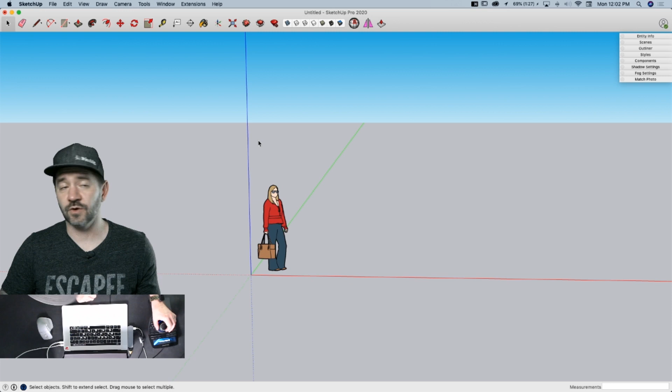For me, it's horrible. I can't use it at all. Well, have you ever committed yourself to it? No, I mean, I've been committed, but not to that mouse.

So to that point, and I've mentioned this before, it does take some time. You do have to get used to it. I would highly recommend taking your normal mouse and disabling the mouse wheel for 2 or 3 days and only navigating with this. You're gonna spend the first hour getting frustrated and clicking zoom extents, and then you're gonna try again. That's normal. But eventually, I did that for about 2 days, then I felt pretty good, and I've been pretty consistent with the mouse since then, and it goes pretty well now.

Okay. MCAD did post a link to an extension. I will take a look at that.

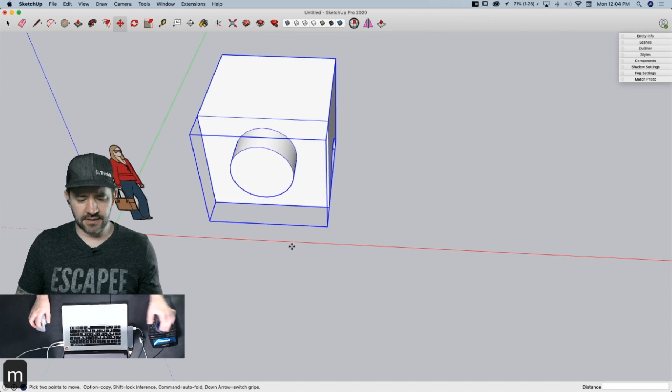All right, I'm going to say that this shape is something I want to cut in half. I'm going to do this a couple different ways, so I'm going to copy this over here at least once. So one option would be to just create a plane. So I'm going to start right here. I'm going to create a rectangle, and I'm going to stick it on this plane. Just a great big rectangle.

I'll take that rectangle and I'll move it to where I want to split. So I'm going to say I want to split it right here, wherever that is. What you could do then is come in context. In context means inside the group. So I'm inside the group at this point. I could select all and say Intersect Faces with Model. So that's going to hit everything in the model. The only thing it's hitting, though, on the outside of the group is that plane I created. So I'm going to go ahead and say Intersect with Model.

And now what I can do is I can take this section right here, copy it, paste it over here. There we go, that's that half. And then if I want to, I could just do that again. This time I'll just grab those same pieces, delete them, and there I have my two halves, and that's easy enough to just close that up like that. So that would be one option as a way to split that geometry. Another option would be to use something like Solid Tools.

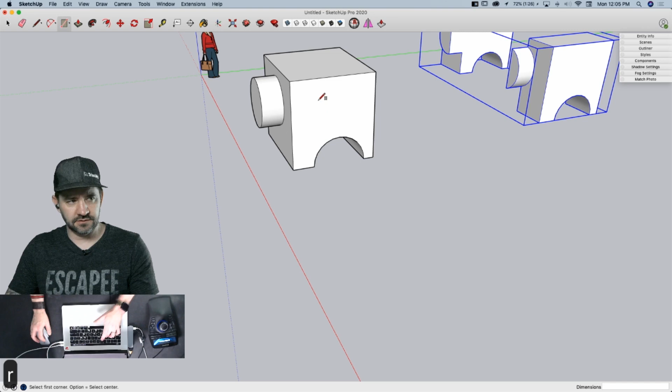So I'll do the same thing. I'm going to come over here. I'm going to create a rectangle on this plane. And instead of just moving it to intersect this time, I'm going to use Push/Pull and pull through that spot where I want to cut it. And now I will take this and make it a group. Now I'm going to grab this whole setup, copy it over here. I'm just thinking of interesting things to show, by the way. This maybe is not the best solution.

I'm going to take this rectangle and push/pull it through itself the opposite direction. And because I flipped it inside out, the inside faces show, so I'm going to hit Reverse Faces. So now I have two of these getting overlapped by rectangles from both sides. Now I'll go to View, Tool Palette, Solid Tools, select my cutter first, say Subtract from here, and it gets chopped off like that. Select the cutter again, subtract from here, and there we go. That's the same geometry I have here, just created with groups instead.

That is just using the simple pieces. There are extensions out there that will cut at a section plane. So I go in and create a section plane, look inside of it, and then say, break my model at that point. I think there's some other cutting tools too. Zorro, that's one of them. That's a great name. Yeah, you're going to cut something, call it Zorro. So check that out too. I have used it a while ago. It does do what it says. It cuts stuff. So give it a shot.

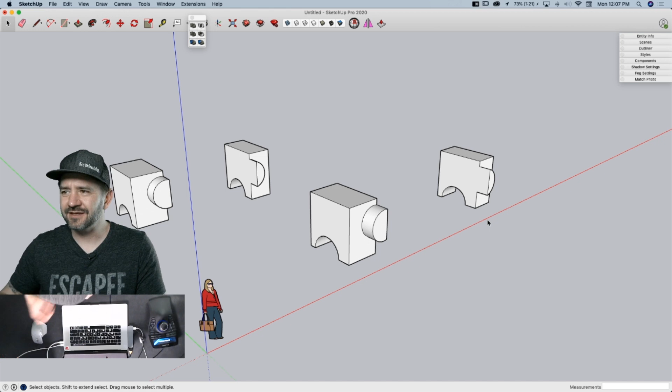Are all the instructions in Spanish? I don't think so. I think it ended at the name. Just a cool name. I think that it should only cut things in a Z form. Yeah, no matter what you do, it just goes like that. That would be a fun but possibly useless extension.

There's not a lot of questions yet. Rob Roy wants to know if you can hear him through his mask. No, louder, please. We're socially distanced by an unknown large number of feet, so.

It's variable. Yeah, we got lots of highs. People yelling in: Libya, Wales, Chile. There was someone hoping everyone was okay on the SketchUp team. I haven't heard of anybody on the SketchUp team actually having it yet, right? Have you? I haven't heard anything.

So, I mean, we try to keep pretty well connected, and everybody's trying to keep business as usual. So, checking in. We have a lot of hangout groups going on. So, trying to stay actively communicating with each other, checking in. And I haven't heard anybody say they've gone down. I've heard people say they know people or have relatives who've gotten sick, but I haven't explicitly heard anybody on our team say that they got hit with it yet.

And so far, I don't even know anybody that's been confirmed to have it. I have one friend that thinks he has, but who knows? I have a friend who had a roommate who had it. I'm like, oh man, lock him up. We're starting to get a little too far out.

Okay, so Barry McFadden asked this earlier, at 12:02, oh, 7 minutes ago, way back. And I don't know if you can help him. He just said sometimes when he makes a component, it doesn't group the geometry. I think that's maybe... We can do that. Well, I think I know. You show it. I believe the issue is right here.

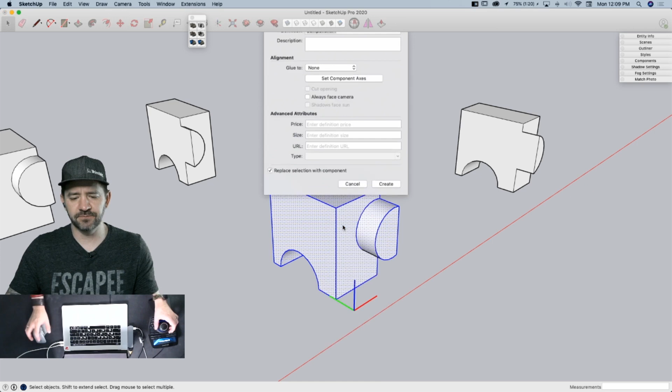So this is just loose geometry. It was a group, and then I broke it apart. So if I select this geometry, right click, and say make component, there is a checkbox in here that says replace selection with component. If this is turned off and I make a component, it has created that component. That component exists. In fact, if I come over here to components and look at what's in here, this component right here does exist. But this right here is still raw geometry.

You have to have that checkbox turned on so that it takes your raw geometry, throws it out, and replaces it with the component in the exact same location. So I'm guessing, go ahead and verify this right now. I'll stick around. Make sure that that checkbox is turned on, because most of the time if that doesn't happen, that's exactly why. That was my guess too. I support your answer. Great minds.

Kay Brooks asked if you're up for answering any DC questions. If we keep them on the surface, yes. Okay. Also, while they're rephrasing that, Leon wants to know how good SketchUp is for interior design. Oh, I was going to say countless. I'm sure we could count it, but a lot of interior designers love SketchUp. The nice thing about SketchUp... Go ahead. Go ahead. No, I'm done. Oh. You sound so defeated.

I was going to say the nice thing about SketchUp with interior design specifically is that SketchUp moves very quickly, so it's real quick and easy to iterate ideas and that kind of thing inside. We have a lot of people who will do design reviews with their customers sitting right there at SketchUp, so they can actually go in and move stuff around. The other thing is our 3D Warehouse, with just over 4 million models available. It's super easy to find assets to put into interior design. So yeah, great tool for interior design.

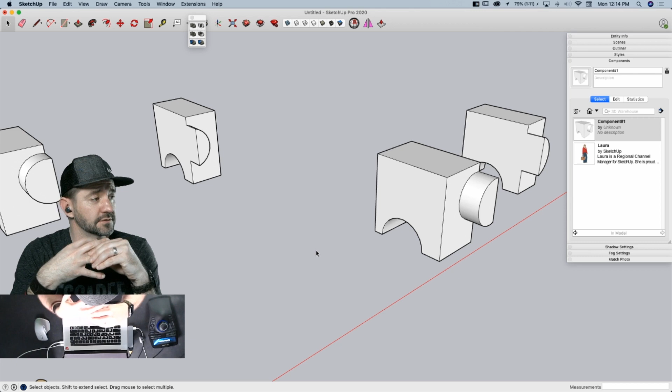That's one thing that gets a lot of people when they're bringing something in from AutoCAD: if they have it preserve origin, then all their stuff may be completely away from the origin, because AutoCAD or a lot of CAD programs don't really care about that origin location. Right. Yeah, depending on the CAD you're bringing in from, it may have something like world coordinates or local coordinates, and sometimes transposing those across programs can cause problems. So people bring in original data, end up putting their data halfway around the world from the origin, and that can cause problems too.

I did see a question just a moment ago asking about Soap Skin and Bubble. I saw one. Isaru had an error message. Is that the one you saw? Yeah, time limit finished. Yeah. Go upgrade or update. Usually that's it. Actually, Dave Richards answered that three lines lower down.

Phew. So you're slacking, or I guess you're just too talkative. Well, I'm just not as fast as Dave, and I've accepted that. Okay, that's fine. He doesn't have to use audible words. He can use... That's right.

Visible words. Manny Hepburn wanted to know about exporting models from the 3D Warehouse without bringing its materials, i.e. export it to his model with default face colors. Nothing that I know of. There might be an extension out there that does something like that. What I always recommend, if you're going to bring in something from 3D Warehouse, is don't bring it directly into your working model anyhow. Download it, open it up, and then you can do things like go in and delete your colors.

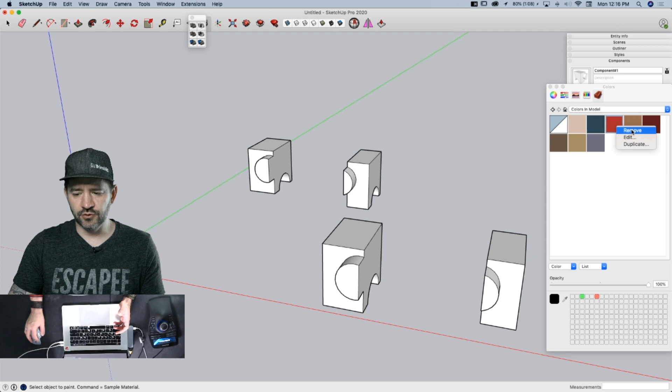So this model right here, I do have a handful of colors because of Laura. So what I could always do is come in here and remove these colors. So I could actually take this red, remove it, and say replace with the default color, and that'll get set back here. So I could come in here and just work my way through and delete them. I believe there's an extension to remove colors as well. I don't remember what that was though.

But if that's what you want, you can pull a model out, remove all the colors out of it, and then take that file, save it and import it into your working model. I say don't bring it directly into your working model because it's hard to get a full appreciation for what's inside of a model when you're looking at it on 3D Warehouse, because you can't see everything. You can do some orbiting and panning and zooming in a little bit, but you can't really get into it, select pieces, toggle hidden, check tags. You can't do all that while you're looking at it in 3D Warehouse.

So I always recommend downloading and opening it. This is just my workflow too. If you have a different workflow and it works for you, that's cool. I try to download it locally, look at it first, and then import it into a model. That just prevents it from, sometimes you download something that seems like it should be innocuous, and it turns out that the dishwasher I downloaded has 7 million polygons because who knows why. So that's something else you can check for when you import.

So K Brooks came back with their possible surface level question about DCs. Can options be programmed to be invisible until a parent option is chosen? No. UI is UI. There's no control over if UI shows up in a dynamic component. I can't think of any way to make UI change. Yeah, okay, fine. I don't think so.

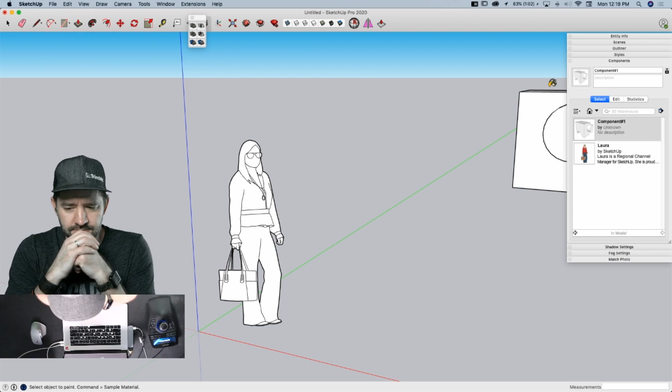So, what I would recommend, I don't know that there's a single style that works best, but as you're learning to work in SketchUp, the thing that sets SketchUp apart from other modelers is the look. Some people think it's cartoony. You have full control over that. If you go to your styles window, there's a couple things you can turn off. Profiles is one thing. Profiles is that darker line that goes around the outside edge of something you're looking at. Sometimes turning that off gives a crisper look that people prefer.

The other option is to turn off edges altogether. Then you're looking at just a solid model, shadowed, hidden look like that. I would highly recommend, it's going to slow down your model, but you could check out shadows too, because turning on shadows will definitely give a more realistic look. It is processor intensive, so if you turn on shadows, it is going to slow your model down a little bit. Generally speaking, one of the things that wins people over to SketchUp is its speed and ease of use.

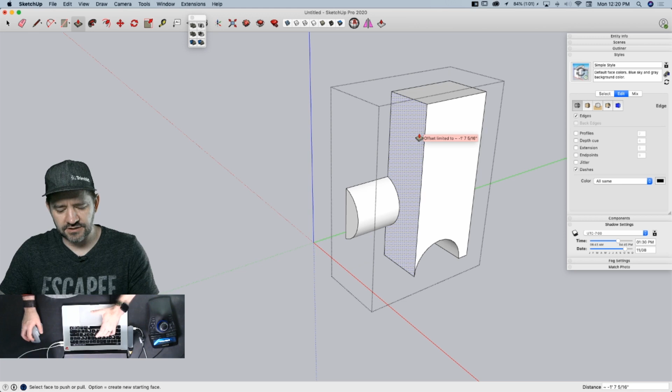So regardless of the style, the fact that you could come into a model with your coworkers, make changes, whatever modifications you need, you can do that live while you're sitting there with your coworkers is what gets people to go, oh, maybe I should check that out, because we've seen live design sessions where people went through with customers or coworkers and just overhauled an entire design, entire model,

in half an hour, something like that, where traditionally they'd be modifying the model, generating output, sending it over, there's 2 hours gone, get a response back, go do that again. So hours and hours versus sitting down and working in it. That can make a big difference for people. So that's something to consider showing.

As far as a specific style, I don't know that there's one style that is a professional style. I would say look at it and see what's going to look closest to whatever your coworkers are expecting out of CAD. The nice thing about SketchUp is, given your styles, you can pretty easily emulate other looks. So between your styles and your camera settings, where you have things like your field of view, you can change how exaggerated that field of view is, or even go to your camera and change to parallel projection if that's something they want to see.

Play with that, and not that I'm saying you should always emulate another look when you use SketchUp, but to ease that transition and make it look like what somebody's used to, it can really help with your cause of advocating for SketchUp where you're at.

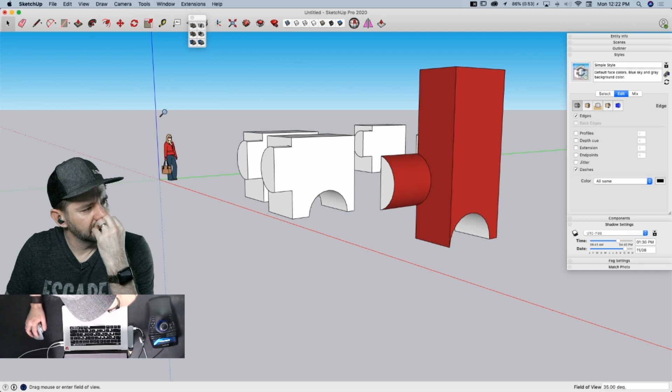It seems like there was an extension, I'm trying to remember now, that would find maybe... Dave or somebody out there, John's out there, Chris is out there. Do you guys remember an extension that would find your components in your model by face count or something like that? Statistic selected. That's true. Oh, is that the name of it? Dave is recommending Statistic Selected, which I believe, and correct me if I'm wrong, Dave, will give you information about selected geometry.

Because, oh. Yeah. Sorry. Keep it simple. The KISS method.

So Go Fly Drone asked how to, so this one's one you do all the time, so it's probably good just to take a moment and explain it. How to import a picture, but keep it in 2D so you can see it all the time from any angle within the model. Yes.

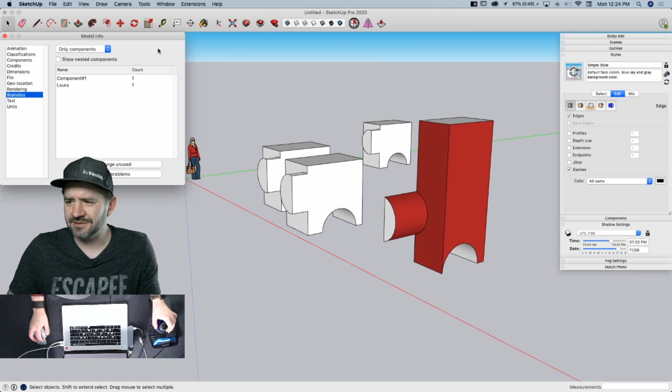Hello? Sorry, I'm trying to follow Dave's suggestions. Under statistics, I only have entire model or only components. I'll come back to that when you tell me what to do.

Yes, so if you want a picture, I do this a lot for reference photos. If you go into your styles and across here, it looks a little bit different for Windows than it does for Mac, but you do have these tabs right here. This fourth button is Watermark. If you click on Watermark, you can load an image. So if I go grab this thing right here, it's going to start by putting on like a watermark, so like an image laid over the top of your model.

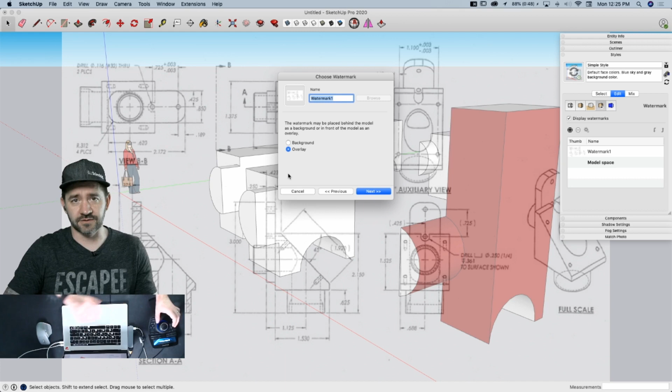The purpose here is, if you print this out or something like that, you can put your watermark over it. So this is a cool way to put your logo or, you know, preliminary, you want to put a watermark onto your model, you can do that. But what you can also do is say, I want to put this in the background. This is going to sit behind your model. So now, no matter how I move this around, it's always going to land flat and back like that.

So what I often do is come in here, you can put a slider, so how much do you want to see? I usually set it to 100%, and then I usually tuck it into a corner. So I say position window, usually up here at the upper left corner. Make it just big enough so I can see the information I want on it. And now I can work on whatever my model is and always have that information up there. So that's how you would take an image and put it on your screen so it stays the same no matter how you're zoomed in, with a watermark. So that's a good question.

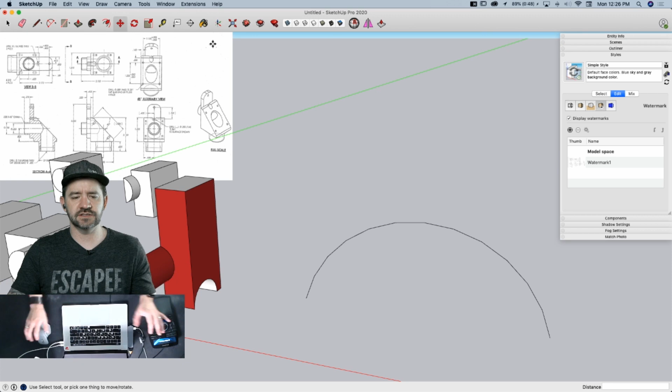So Derek on Facebook asked, the other day during the Airstream modeling, you modified an arc just by moving an endpoint. How did you do that? So let's do that. I'm just going to put an arc here along the red axis, and pull it vertically along the blue. The way move normally works, if I go into move with nothing selected and I hover over, say, a group, I can click, grab it, move it around. You guys know that. If it's raw geometry, I can move a surface, a line, or I can move over a point, and then I'm moving just that point.

Arcs are kind of funny because as I move them, they'll actually scale. So I'm not just grabbing that end point of that last segment and moving it over. I'm actually going to cause the scale to resize and distort depending on how and where I move that. And that's all I did. I just happened to grab the end of an arc that was, I think, flat. I grabbed it, pulled it over, so it just kind of expanded the arc as I moved it. So pretty simple. Move is nice. A lot of people don't realize that if you go straight into move, you can grab whatever point you want and make changes. So if you grab an end point, you can actually deform that geometry from that point.

So Tyson on Facebook asks, well, it's rather lengthy. He opens with our favorite sentence: I love SketchUp so much. Know it's been discussed on the forum, but I'd love to hear what you plan regarding UVs for SketchUp. Will SU ever integrate native UV capabilities? It sounds like he understands that we can't talk about our roadmaps, but he'd at least like to hear your thoughts on the matter.

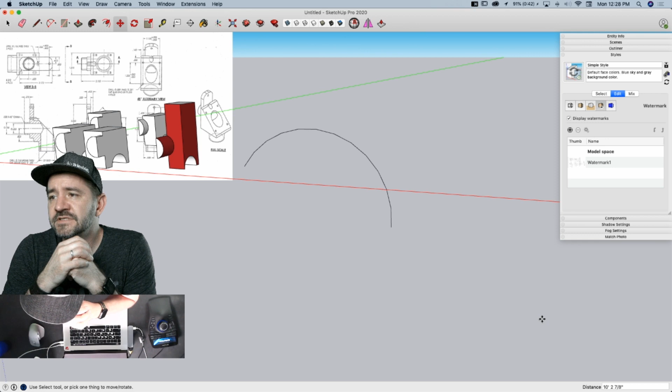Even if your thoughts are use a plugin, I'll say that there's a handful of great plugins for UVs. Personally, I like that SketchUp does and always has focused on what they're good at, which is 3D modeling. And I think there's a lot of tools out there that get distracted by bringing other workflows into their core competency. I don't know what the future will hold, and if I did, I couldn't talk about it. But I've never been bothered by the fact that if I want UVs, I can go grab Wrapr or SketchUV or something like that.

So I don't know. Like you said, unfortunately, can't say much about it beyond my thoughts. And that's it. That's my thoughts. That's all I got. Hey, well, sorry, Tyson. At least you have some.

Okay, so I think there's a good question in the middle of this. So this is Manos on Facebook. When I make a house floor plan and make the walls, there are a lot of times that the walls are not solid. So he can't make them and then subtract the doors and windows. He uses Solid Inspector, but no result. So he would like to know the right way to make a floor plan. I think this is one of those we ran into before, where it sure would be handy if you had some floor plans on your computer.

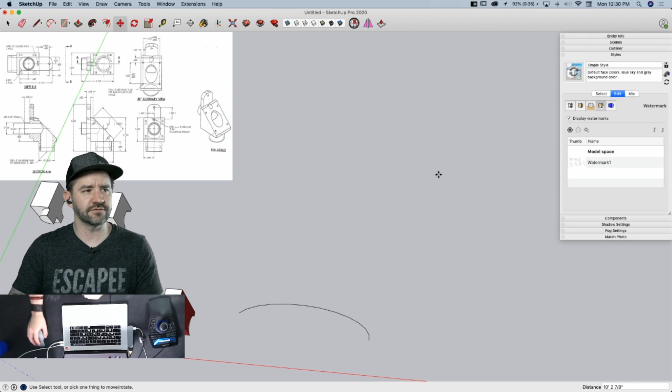What I would recommend is, and this is just going to be kind of a dummy version, I've got to turn this off because this is distracting me. All right. So as you're working through here, get your exterior layout. So this is the shape of the floors of my house, something like this. So that's just tracing my exterior walls. Then I would do an offset of whatever my wall width is, so I'm going to do 5.5 inches. Then pull that up to whatever my height is, 9 foot.

And then I would triple click and make this a group. That's my first group, my first floor exterior walls. This then can be made solid. So if I wanted to come in with whatever my door is, so if I create my door, I could actually bring this through and then subtract that from here, and I could make those cuts real quick and easy.

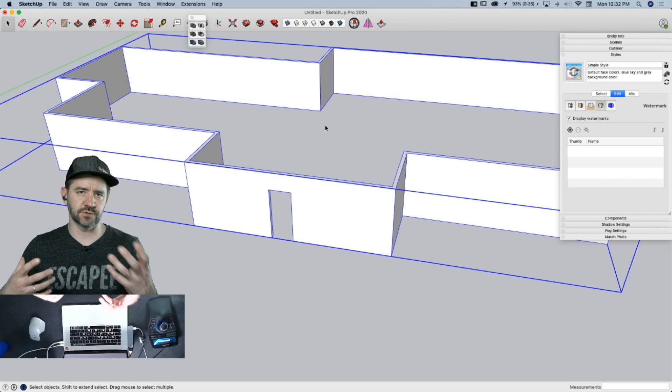When you get into interiors, it's not quite as simple because, again, this kind of comes down to what you're going to use it for. What you might want to do is take each wall as you create it and make it a group, because that's going to make it a simple solid. The problem a lot of people run into when they're doing architectural models like that is you end up with so many lines, so many pieces, so many things. It's really hard to watch as you do each piece and make it a group. But that would be my recommendation, is try to do that.

The other thing to keep in mind as I do this is, so now I have two solid groups meeting at the corner. That's great, but that also means I have these extra lines. So this line right here, for example. And that's where what I have to do is come in here and then maybe just shift erase this line. And, oops, I did not shift, I alt erased that line.

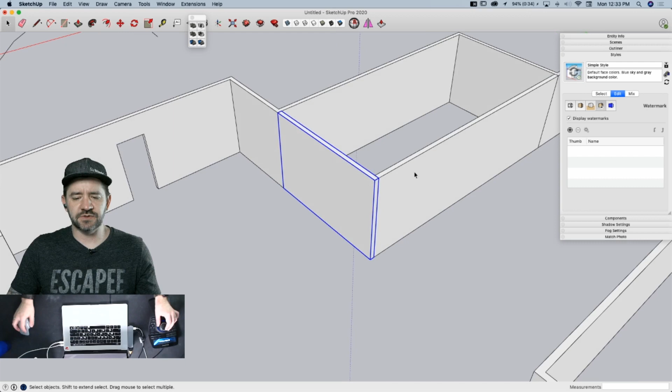Sorry, shift erase that line to hide it. Shift erase that line to hide it so that I get a normal corner right there. In fact, I'm spewing thoughts now. If this is an issue, if you do want to keep each wall as a separate solid, like I said, that's awesome. It's a great way to do it.

You might check out an extension from Eneroth called Visual Merge, which will actually do some of that kind of stuff automatically and get rid of those overlapping lines. So those are all things to think about. So if there is a specific model you're having a hard time with, I would say head to the forum, make a topic, and if you can, post the model, because then somebody can actually take a look at it and maybe help find, maybe there's something that you're doing along the way that's causing them to not be solids. But yeah, it's a good question.

Sorry, I was typing answers, and so I wasn't scrolling through looking for great new questions. Nepali on Facebook did ask about how to make dynamic components through coding. I sent him a link to your videos. So just so anyone that wants to learn about dynamic components is aware, there's an 8-part video series at this point. 8? And I will say, there is no coding in there. I do know that's possible. What about math? Is there any math in there? I will venture into math if I have to, but I can tell you that I did not use any Ruby scripting of any kind.

You know, actually, that question's come up dozens of times. People want to see videos on the basics of coding, basic Ruby scripting. And that's never been my thing. I'm not sure if that's something that's interesting to enough people that we could go in and try to learn that together, but Ruby scripting falls outside of my area of expertise or knowledge, so I won't say that I did it with code.

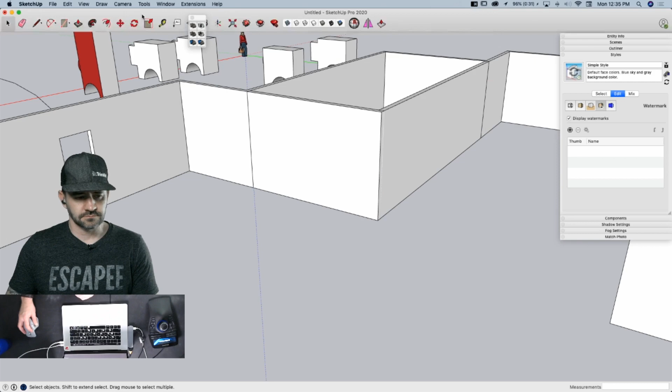Yeah, I forgot to call that out earlier. Thanks a lot. Now I didn't remind you, so I guess I'm equally guilty. Well, I think it's mostly your fault. Okay, good. All right. Wait, my fault? Dang it. Next time.

Let's bet 20 said, can't push pull opening to offset limit. Cutting stays connected to wall and only extrudes inward and outward, but never removed. I would guess something is out of plane. It's not easy to show, but here, let me see if I can cause a problem. All right, so these walls look pretty close to being parallel normal, but that back plane is just off of being parallel, so it will never actually let me remove the face.

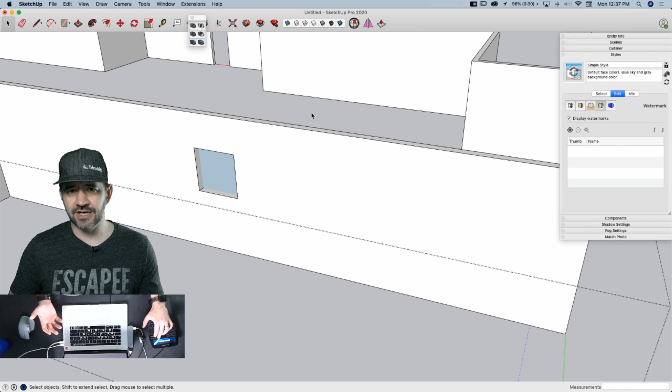I can get close to the face, but I can't actually take it and cut it out because this wall is not perfectly vertical. So if you have something like this where you're push-pulling, it's possible that something's not quite right. There's a couple things you can do to fix it. First thing I always recommend is turning on hidden geometry. Show hidden geometry, because sometimes what will happen is you'll have a break.

Autofold is this cool thing that happens inside of SketchUp when you move geometry, where this face will break into multiple pieces in order to accommodate the fact that you're moving the edge. So autofold's great because it can let you create really cool geometry, but if you're not paying attention, it can take what looks like flat geometry and actually put wrinkles in it. And you can see those if you turn on hidden geometry. The other thing to check out, like I said, I just took this and I moved this bottom out just slightly.

You can actually check coordinates, see where stuff is, just by using the text tool. So if I take the text tool and I move it up to an end like this and just click, it's going to give me the XYZ coordinates. So if I do that again, I'll put one on this bottom here. So if I look, whoops.

So you can see right here, my X coordinates are the same, my Y coordinates are off by 1/8 of an inch. So that's where this is actually pulling out. Then of course my Z coordinates are different because it's the top and bottom of the wall. So those are some things to check out.

Again, I would recommend post to the forum and let somebody take a look at it and maybe help you out. It's hard with stuff like that because it's usually something specific that's going on that's preventing this from working. And sometimes it's hard to guess what that might be without being able to see the model. So if you have an example you can share, I would suggest posting on the forum and letting some staff or Sage or other forum members take a look and maybe help you troubleshoot.

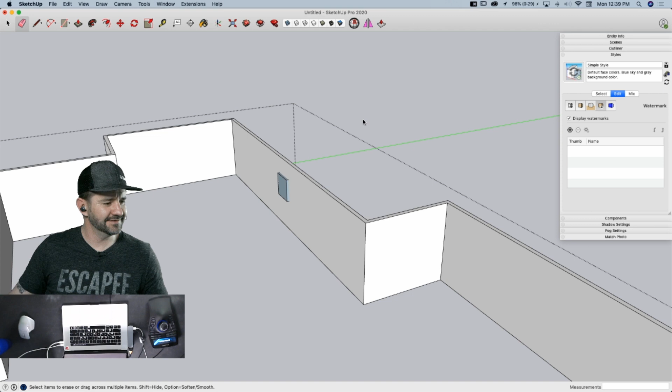Yeah, and it's interesting, this is Architecture Inspirations on YouTube who corrected me and my gross simplification of UV to mean fancy textures, which it's not. Right. It actually has more to do with the exact placement of the texture on the geometry. Maybe he was explaining it to me, and maybe he's not asking a question. But oh, yeah. Well, that would be the problem. So what you're describing is what UV mapping does. It sounds like you may already know that. But anybody who doesn't know, I think that was a good example.

Yeah, no, I think I do now see that. I'm just basically reading out when he corrected me. Thanks again. That was an A and not a Q. Yay! I love it when those come from the other side.

Okay, so here's the other curvy one. What's the best practice to cut openings in curved walls? Should one use two solid forms and use the unions to cut? Yeah, I think it would, if you do have something like a solid. So let me just do something like this. I'm gonna take this shape and offset it ever so slightly, connect these two together to get a face, and then pull it into 3D space. I'll turn my hidden geometry back off.

If I can make this into a solid group, then the easiest solution is to come in here, create a second solid that is my cutter, make that a group, and then I'm going to do this 2 times. Do it once with solid tools and once without. So with solid tools, I select my cutter, go to my solid tools, say subtract that from this, and I get a hole there.

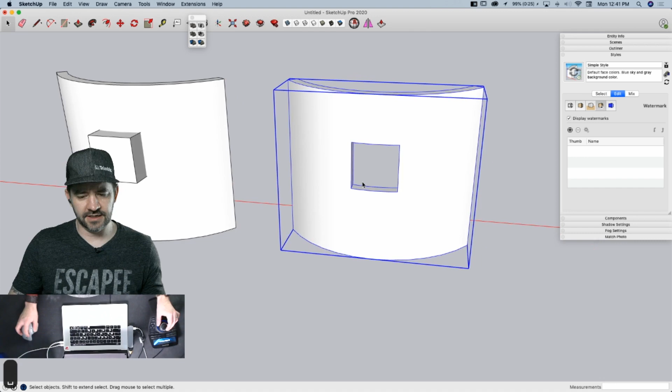If I don't want to do that, if I don't have solid tools, or this is a piece of bigger geometry where I can't make it a simple solid, I could take this geometry loose like this, so it's just loose geometry. I'm going to take my cutter geometry, I'm going to say reverse faces, and I'm going to grab all this geometry that intersects, right click, intersect face with selection, and I'm going to come out here and start erasing away my geometry on the outside. And then I can take these faces right here, delete those, and delete that.

So what happened was these two faces got cut by that cutter, and the cutter got cut by those faces. So these pieces right here are actually the leftover pieces of that cutting rectangle I had in there. I reversed them so that after they were cut, what was left behind was facing inside of the hole. So those would be your options for cutting an arced surface. It's not as simple as draw a rectangle on it and push pull.

One thing you could do is you could get into extensions and use things like Tools on Surface to create lines on the surface, and then something like Joint Push Pull to push it through. But it really depends on what your actual needs are and how difficult you need to make the process.

Okay, so a while ago, Nanda asked if these videos are available to watch later, which ties into an additional question from Eric on YouTube, which was, as architectural models get larger, when working on small details, you have to zoom in very close and clipping. So I would say to Eric, probably you need to go back to our answer of the clipping question earlier, and to Nanda, we have it available online. Do you have any thoughts on clipping whenever it's tiny versus whenever it's giant?

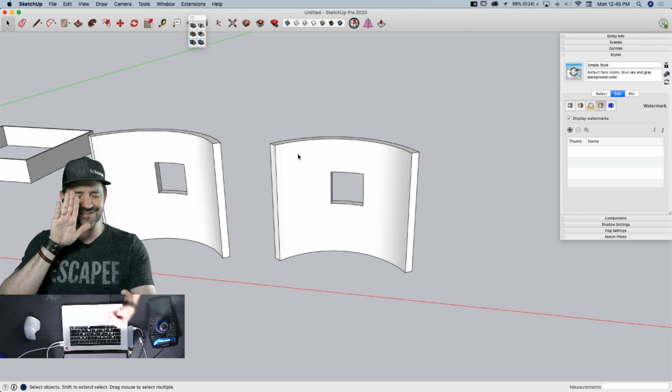Yeah. I'm not sure how much scaling would fix that or not, but I had somebody explain it to me as if you were to take an architectural model and build it out of balsa wood and foam and plastic, like we used to in architectural school, and then you wanted to get real close, you just smashed your face against the edge of it. That's basically what happens when you experience that clipping plane. The camera's coming so close to geometry that you're going into it.

Whenever my kids want to show me something, they come over and stick it immediately in my face, and I can see nothing. Yeah. I still have to tell my kids, I don't focus real good right here. Give me at least 6 to 12 inches of focus space. Ugh. So it's all applicable.

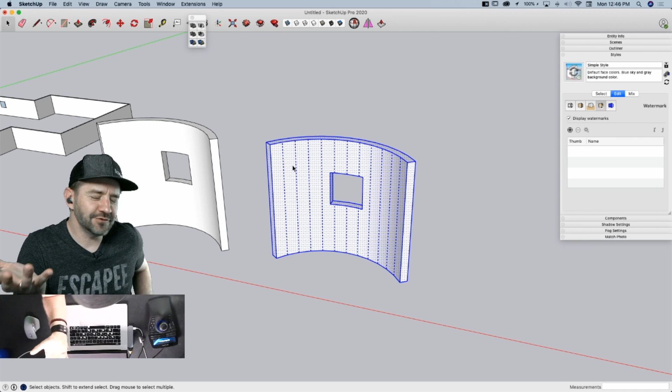Well, if I have to answer in Russian, I can only say da, because I think that's all the Russian I know. And I'm not 100% sure on that even. I think that means yes. Yeah, that's movie Russian. All right, just because we're hanging out, we're having fun. Who decided in movies that German people speak English to each other in German accents? If you're two German dudes talking about something, wouldn't you just talk in German? It's so funny to me that I keep watching these movies. Obviously you're not German, apparently, Aaron. Yeah, it's true. You just wouldn't get it.

Okay, well here's something I get. So if I wanted to take this geometry right here and rescale, let's say this is supposed to be 2 inches tall. Obviously it's a lot bigger than that. I'll draw a line right here. It tells me it is 32 feet tall. So if this is supposed to be 2 inches, I would triple click and make it a group. Put all the geometry inside of a container first.

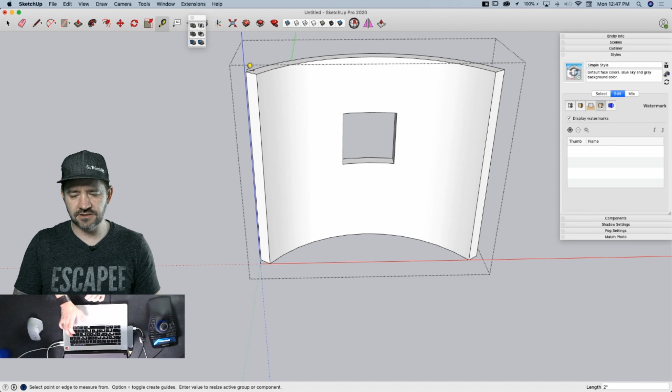Then I'm going to double click to enter the container, grab my tape measure tool and click from the bottom of one side to another side, somewhere end to end on a line that I know the size of. When I click here, right down at the bottom, it tells me what the length is, and I'm going to tell it what I want it to be. So I'm going to say 2 inches, hit enter. Do you want to resize the active group or component? Yes, I do. There it goes, it gets teeny tiny. If I come out, here's the original one, and right down here is my new one.

That's adorable. It is. What is that? A curved wall for ants? That's right. 2 inches tall. It's a little tiny guy. You could 3D print this. One could. Oh, okay. I thought you were giving me permission.

But sorry, Blake just said, because Americans don't want to read subtitles. I think that's true. So this is funny because that's sort of true, but I've found that on all of my streaming services, I turn on subtitles because half the time I don't understand. You know, like even if I'm watching Americans talk, I'm just like, what did he just say? And I have to look down and read the text at the bottom. It's whenever I have to read the text that I get all cranky. Yeah, when you don't have a choice. Yeah. Don't tell me to read. I like the option. I'm here to relax.

Someone asked if you could use the extensions in the web version. You cannot. You do have to have Pro to use extensions. It's a limitation of the language we use. Ruby is not available through browser software. So that's where we're at right now. That's what we got.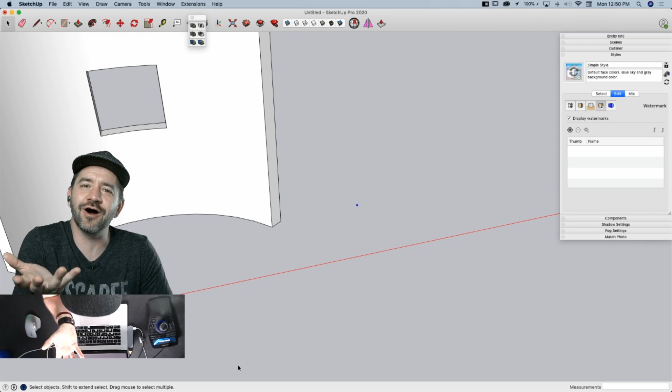So I'll second that, and then I'll return to questions. I scrolled up, and there's one here from JDC AMC. We'll just say JDC for simplicity. Yes. Can you match a color that you downloaded from the internet to an existing material? Or how can you do that if you can? So it's slightly different depending on the UI you're using, but you can. It's in a different spot. I don't know if you remember where it is, Jody, off the top of your head.

In Mac, when you bring up colors and you go to the main color right here, you can actually hit this little eyedropper, and it gives you this control, and you can move your mouse over any color on the screen. So I could sample this blue from the upper corner right there, and then that'll show up in my dropper, and then I can put that on something. The other option, of course, is to come in here. Where is it? Right here, I could type in a hex color. I could change my sliders to CMYK or RGB and put those values in. So it's pretty easy to adjust colors to match something.

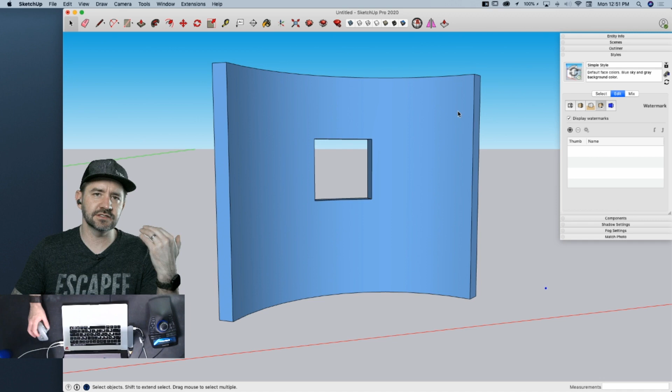Something I'll point out though, because many people have hit this. Let me get a slightly lighter color than this, so this is a little easier to see. All right, if I look at this face right here, I put one specific color on here, but you can see because of the way the light hits it, it's lighter right here than it is right here. See how it gets darker along the edge? SketchUp does have kind of this faux lighting effect it places onto surfaces.

What actually happens is the camera, as it looks at a model, projects the light in the scene. So there's a faint light coming off of you because you are our sunshine that changes only the colors

Sunshine, or? As we look at it. What's that? The only sunshine? No, I only thought you were starting to sing "You Are My Sunshine." That's what I was getting at, and I couldn't stop. I had to laugh.

So you can see this face right here and this face right here. If you imagine the light coming off of you as the viewer, it's creating kind of a shadow, a darker color right here. So that is something that can be compensated for, because I can come in here to shadows.

And shadow settings is kind of interesting because it does have the ability where you can come in here and change the actual shadows that fall on here. But even with shadows turned off, you can control your light and dark right here. And using these, if I turn use sun for shading on instead of my own face, this is a little more consistent because the sun's in one spot.

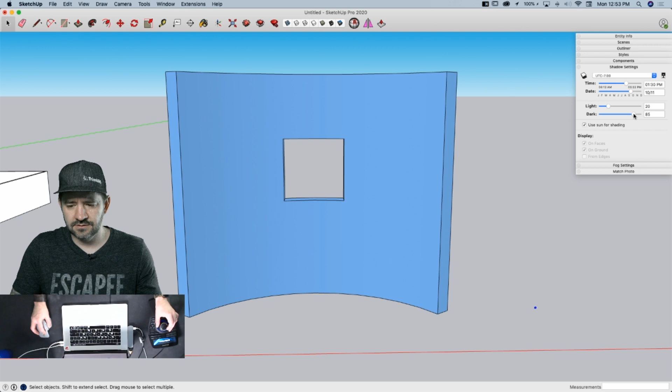Is it 80-80? That gives me a list. It's 80-20. You can also click in the box and type it. I like sliders. All right, if I go to 80-20, then I actually get a consistent color. So you can see there, I'm not getting as much shadow as I was before, but these can actually be played with to give yourself precision colors as opposed to that lighting.

I just mentioned that because you mentioned bringing in an exact material. A lot of times people bring in materials and they're like, oh, this looks way too bright or way too dark. It could be a function of that lighting. So something else to consider.

I just looked on the Windows version, and the dropper is right there, in the very front section of the materials picker. Okay. It's right next to Colors in Model. It's on the right side, right above that picker. Okay. So if I was in Windows, it'd be right up here somewhere. Exactly.

Learn something new every day. You might have already known that. It might have just been a refresher.

Yeah. Maybe. Derek on Facebook asked, he said it's a noob question, but I think it's a good one: what's the value of making something a component versus making a group? Excellent question. So I'm going to make some geometry right here. I'm going to make this a group and make a copy of it over here. If I open up this group and I change it, this other group stays exactly the same.

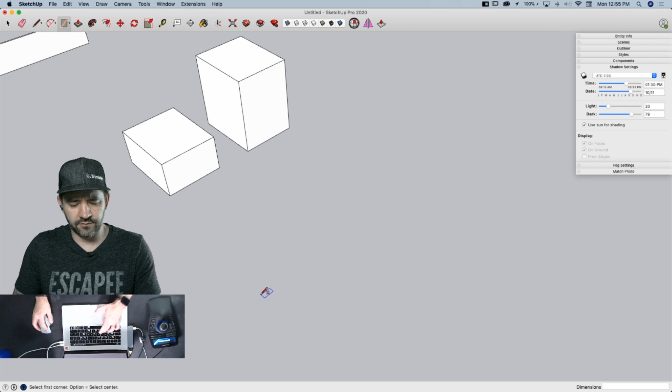If I come over here and make a cylinder, I'm going to triple click and make it into a component. This is thing number one. Components prompt you for information. It says, what do you want to call this thing? What do you want to put in attributes? Has some additional information there like gluing or always face camera options. All of this is only available if you're creating a component.

Once I create it, this is one of the nice options. Oh, I messed with my replace selection. Once it's created, if I come in here and I change this, all instances of that component are changed. The third thing, and this is really nice, is components actually end up getting saved as part of the model. So I can come back at any time and add another one of these components.

So that's, in a nutshell, the three big differences. The tie between them, the info you can put in there, and then the component browser that lets you add them back into your model later on. Good question.

I got confused because Don Smith asked if his question wasn't clear, but I don't remember seeing what his question was. So Don Smith, you might re-ask it because it was so clear I couldn't even see it. I saw right through it. Crystal clear.

And Tim F., I think he's asked this a couple times now. Is there a way to use dimensions to change the size of an object like Fusion 360 sketches? I might have skimmed past it the first time because it sounds similar to using our tape measure tool. Yeah, tape measure, not dimensions. Dimensions are basically the same as parametric, which was another question.

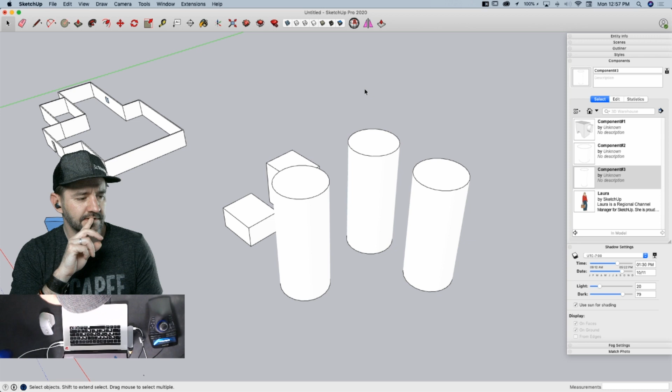Yeah, somebody might have to find that and share a link because I don't remember off the top of my head what it was.

Okay, so here's a long one from Facebook, Nathan on Facebook, and I'm trying to basically get the nugget of the question itself. He says he does a lot of models for clients purely to give them a 3D view, and he'd like to figure out a way to make a style where it could fade out existing things and highlight new construction items. It would look like editing a group while the rest of the model fades out. He doesn't like fog. So fog's not the answer, but he would like a way to be able to call out parts of a model.

Maybe layout and masking. Yeah, or maybe masking in styles. It looks like I saw a couple links go by.

First, I gotta say, hey Nate, I actually went to school with Nathan, so it's kind of funny actually because we reconnected at the last base camp in Boulder, which was 2012. Is that right? I had showed up with a bunch of my coworkers, and they all left and ditched me. And Nate was nice enough to give me a ride home. Nice. Yeah, so that was kind of fun. I didn't know, we just kind of ran into each other and hey, how's it going?

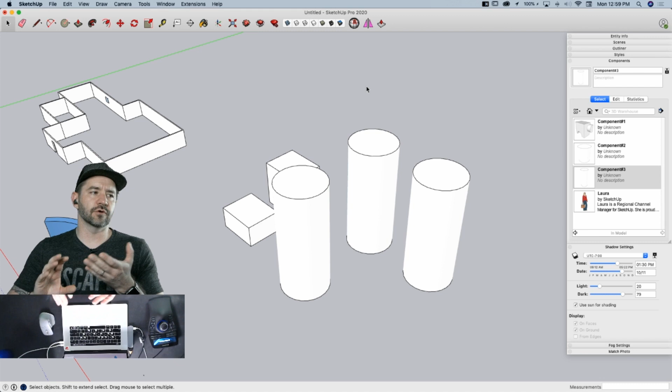So off the top of my head, the things that I would think about would be potentially layout or post processing. That's my immediate thought. Tyson mentioned the fade/hide components feature, but I think maybe that's what Nate was already talking about. He wants something similar to that. Yeah, the problem is, I don't think you can. I think if you export this as an image, it won't keep this. I think it will take everything not hidden like that. But

I'm trying to think of something to do with layout too, because that was my thought too. Is there a way to output? Because what you could do is set up a scene. So say this is my scene I want to create. In this scene have everything turned on, and then if I want to call attention to this right here, I could put everything else on a different tag. And then in this scene, I don't have my tags visible. I could turn that off and then export those two pictures.

So I could export this as an image and then this as an image, and then play with my opacity outside of SketchUp. The other thing I would check out is SketchFX, it has some really cool filters that you can use. I don't even understand how it works, but it uses a combination of tags along with styles, and it creates some amazing stuff. So I'm not sure if it can do what you're asking about, but I would check out SketchFX and see if that would help at all.

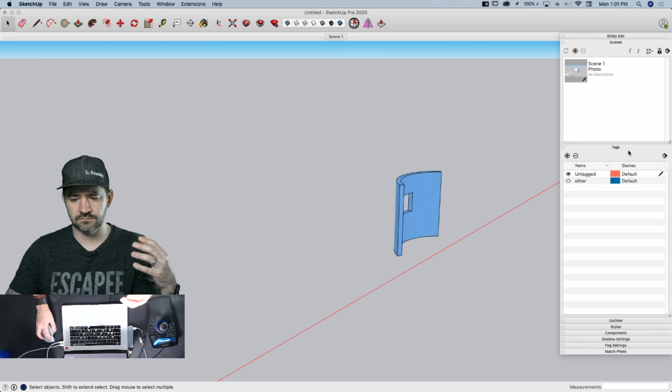Okay. So Don Smith repeated his question. I have a model with an object that rotates on the x-axis with on-click animate, but he'd like to be able to move the same object along the x-axis also. It's a DC question. Rotate and move? You should be able to do that. Yes? I'm horrible. I'm a horrible dynamic component guy. Every time I learn something, it goes in one ear and out the other.

Okay, I see there's a SketchFX Pro and a SketchFX X. That's confusing. Yeah, check that out, Nate, and see if that does what you're asking about. It ain't free.

I have a model with an object that rotates with an on-click animate. If you're saying one or the other, you can't do that. On-click is only one thing. On-click is just binary. When I click on this thing, whatever I have there happens.

So you can't choose whether on-click's going to do this or this. You could possibly, with on-click, put different functionalities on different levels, like in different nested levels. So if I click on the outer level, it rotates, but if I double click and then click, it's going to move. But I don't know, it's getting messy. That's where I'd have to play with it and experiment.

Yeah, I'm not 100% sure. I don't really understand what your question was 100% either. Oh, sorry. So yeah, he actually asked if it wasn't clear, and then he repeated the question. So maybe he can make a clarifying... I'll watch for a follow up.

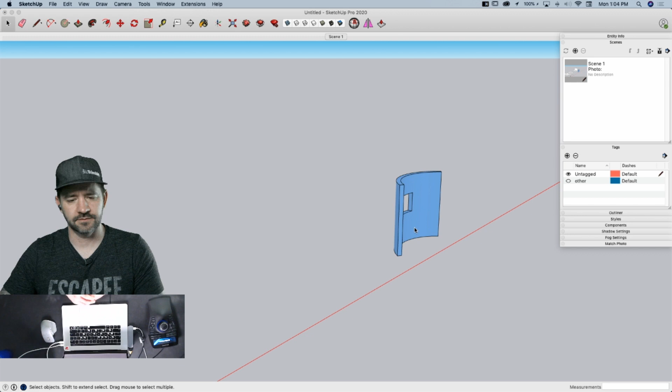So Isuru has asked this several times, and so I can't ignore it. How would you model something like the Gherkin building? Are you familiar with the Gherkin building? Is it a small pickle? It looks like a giant small pickle. I don't know. Can you throw an image up onto our forum? Yeah, I'll stick a picture on there. It basically looks kind of like a rocket, and it's got this kind of rotating helix pattern to the stuff. But let me stick a picture up there, unless he beats me to it.

It's in London, Colin said. It's a race. Colin being our resident English fellow. Our resident Londoner. Yeah, our token Englishman. I need to be able to save this flipping image now.

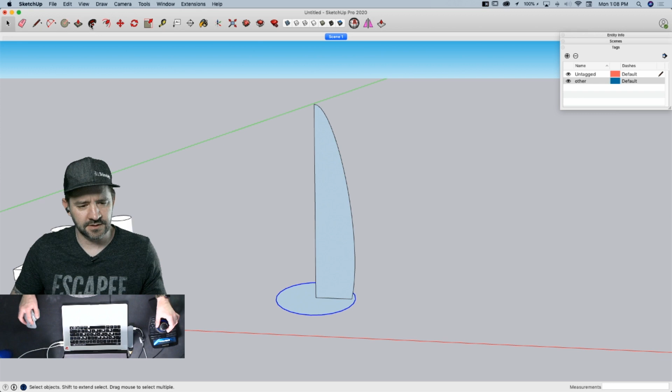All right, so I'm going to take this shape. I say follow me with this shape. That's going to give me that initial shape. I'm going to grab all of this. I am going to, what is going on?

I'm having some issues. I spend a lot of time changing my screen setup, my exterior cameras, my audio equipment as I do different things, meetings, recordings, live streams. And sometimes I should really just be shutting it all down and starting over because, yeah, something's going on with my UI now. And I think it's probably on my monitor upstairs or something.

So I'm going to say that. And now what I would do is I would take a line like this and I would trace this. I'm not going to do this all the way because that's a lot of sitting here watching me click. But I would take that all the way around. Then I would take that. Maybe you could stitch it together. Fine, I'm almost there.

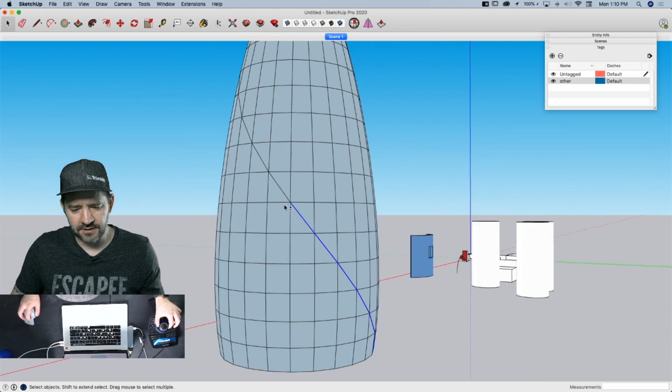And again, sorry, everybody. I didn't watch my numbers on this, but I would do something like this. So I'd grab this, take that all the way down there, and now I'm going to grab these lines that I just created, and then I will make those lines into a group.

While you're doing that, Dave posted a picture on the forum of how he would use layout to get that. Oh, perfect. That focus thing for Nate. So Nate, go look on our forum.

So I would do that. That's pretty good. That's less than 5 minutes worth of work. So something like that. It sort of trivializes the genius of the architect that actually did the original building, doesn't it? Oh, he did a great job. He's fine. He did excellent work. Yeah, so then you could go from there and start adding colors, breaking things apart, window trim, whatever. So, yeah, something like that.

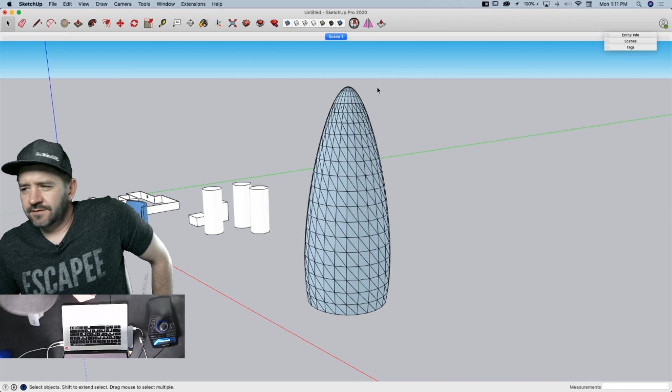All right. So now there's so many people helping. I don't know when someone's asking a new question or answering a question I'm about to do. Transom said, could you model like you did the spiral or like a screw thread and then squeeze it with a plugin? Actually, this is hard. I'm trying to remember what this is even called, but it was just native where we did a bunch of spirals and talked about scaling geometry and that sort of thing. I don't even remember what it was called or how we'd look it up on YouTube.

But once you connect geometry like that and start scaling, you can actually create this sort of deformation pretty easy. I just didn't remember the steps and didn't want to jump into it without remembering it. But at the same time, yeah, I think Fredo Scale might have something in there to create a bulge like that. That's possible as well.

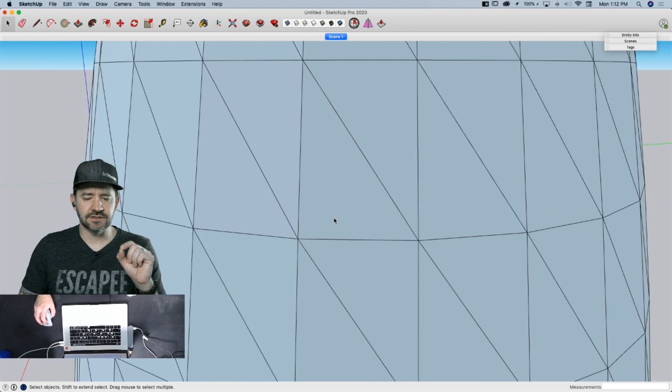This is a good one. A lot of people might already know it, but how do you avoid excess zooming? It's probably worth just talking about how zooming works based on your cursor. Yeah, so one of the big things people don't get is, and I'm just going to put this aside, we're just going to talk about this right here, just with the mouse. When you zoom in and out, it actually looks at the pixel that is under the tip of the arrow. So as I zoom in and out, it's always looking right there.

One of the things people have a hard time with is they get weird zooming because they'll be hovered over nothing and zoom, and then it can be kind of odd, or it can go real super slow because the geometry you're on is real close to the camera. So if I come in here like this, and let's go this way. If I come on to this piece right here, all of a sudden my zooming is super slow right now because I'm getting real close to that line.

That's something else to notice is your speed will slow down as you get closer and closer to a surface. So whereas I'm out here, I'm zooming real quick with just a small roll of the mouse, just a teeny bit is going to zoom me way in and out. As I get closer and closer, it's going to get slower and slower. So you can see here, I'm just zoom, zoom, zoom, until eventually I break through to the other side.

So I don't know what excessive zooming is, but I think that's probably it. Sometimes if you just put your cursor in the wrong spot, especially when you don't have anything else in the model. I've definitely run into that a lot more in a fresh, clean model. It doesn't really know how fast to zoom anywhere. Yeah, it's definitely about where your mouse is. Transform also suggested zoom selection.

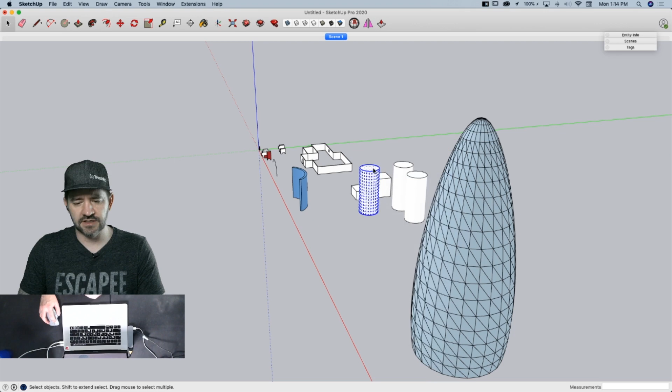Yeah, so that's if I select something. I'm going to explode this. If I grab just this circle right here, you right click and say zoom selection, it'll blow that up so it fills your screen up. So that's actually really nice. Colin, who's on the forum here, actually said that he has assigned that to a shortcut key to speed up his modeling. So he can just pick on something and hit his shortcut key and it'll zoom in and fill the window. So that's pretty cool too.

I'm fairly certain that I've never used that function. I might not have known what it was doing whenever I looked at it. Everybody can learn something new every day. Even you, Jody. Yay.

Speaking of Colin, he answered a question that John Doherty had asked from YouTube: is there a way to copy a component from a model on one project into a project in the web version? Colin confirmed that you can copy from one SketchUp model and paste to another SketchUp model, even in the web version, which would have been my answer in the client. Awesome. I didn't know you could in the web. Dave also suggested 3D Warehouse, or save it locally, or save it to Trimble Connect.

The thing about components is they're just SketchUp models. So once I create a component, I can take that component, save as, and put it anywhere. I could save it to my desktop, I could upload it somewhere, and then in the new model, I can just say import and pull that file right back in. So any way you would transfer a component between places, 3D Warehouse is great, your own computer's good, your clipboard's nice, Trimble Connect, any of those will allow you to put your model there, go into something else, and pull it back in.

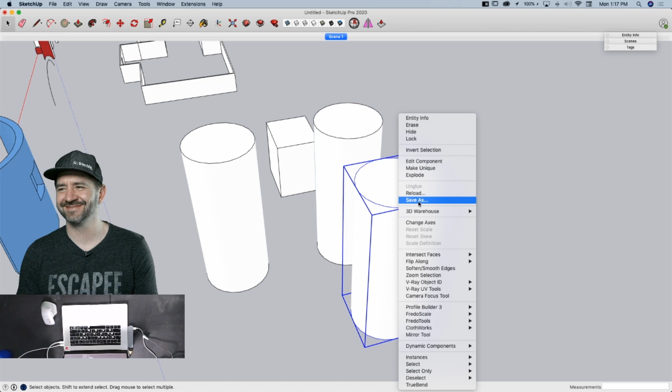Jerry on YouTube has asked kind of a loaded question. He said, how does SketchUp compare with AutoCAD? It depends on what you're comparing, really. I know it sounds like a smart guy answer, but they're both drawing programs. Technically, they're both CAD. I think they both have their own strengths and weaknesses. A lot of people ask that question, why should I have this instead of this?

And we at SketchUp pretty much say, if you're designing something, there's a good chance you might need more than one software package. So we do have people who have switched from AutoCAD and use exclusively SketchUp and Layout, and that works. We have a lot of people who do their 3D models either initially or the full way through production inside of SketchUp, but use AutoCAD for their output.

So yeah, I would say that the big differences are price, learnability, and usability. I think all of those pretty much go towards SketchUp. It's definitely easier to spin up on it, usually quicker to use, and costs significantly less than AutoCAD. But really, as far as which one should you use, it really depends on your workflow. And there's a good chance that you'll get the most by having both.

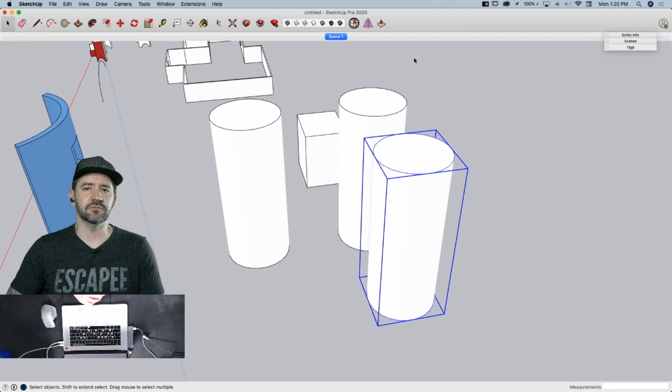Here's what I think. So really, the thing about BIM is it is a term that's used all the time, and it means something different to so many people. Some people say BIM when they mean a 3D model. Some people say BIM when they mean data in a model. Some people refer to spreadsheets as being their BIM. So it's a hard question to say, what do you think about BIM? Because he's asking for practical use. Maybe have you found something that you do that is BIM-like, that actually applies as useful to the way you use SketchUp?

I think with components, just the component data that you can put in here. So if I make a component, reporting upon basic information like this is super easy functionality to add on top of what you're already using. Along with that, using things like generate report to get lists of materials or prices out of something, or something like cut list or estimator to do the same.

My background is architectural design, so designing buildings. So for me, BIM was lists of materials or properties, that kind of thing. So it's super easy to get a door schedule or a list of your building components out of a model. So when I think about that level of BIM, that data is super easy to put into SketchUp and report upon. So that's where I go with practical BIM myself. Hopefully that helps. Thanks. Hey, no problem.

Is there a way to have a set of materials in a template that will be preserved beyond the purge all command without them being physically in the model? No. I don't think I've seen a way to do that. No, Purge gets rid of anything that is not on your screen. There's not a way to hold on to components outside of that.

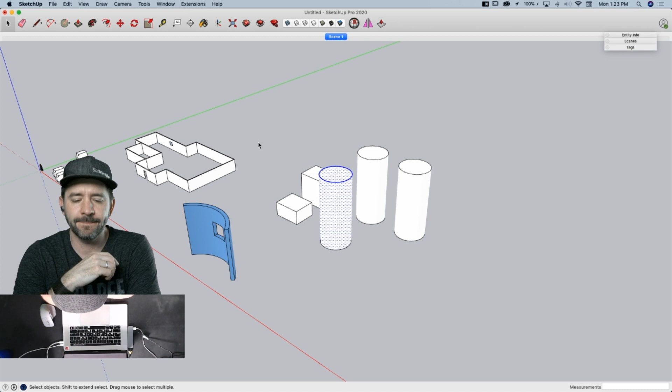Is there an easy way to cut off all of the angled ends, for example, Redwood lattice, after you make all the slats? I think that's probably an intersect with model kind of thing, right? So imagine you made a lattice and all of your boards extended past each other and you need to trim them along a line. Yes, absolutely. Then it would just be, oh, come here. Come back in here. Yeah, I would just say SolidWorks, or Solid Tools. Got me thinking about other software packages.

So if I take this to 45, and if I was to... that was a terrible lattice. Oh, I didn't make them components? Oh, come on, new guy. All right, let's use an extension real quick. All right.

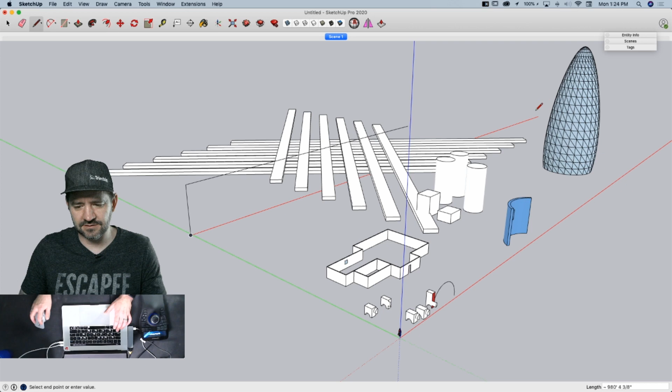You know, rather than rotate, you could just make a copy and flip along the red axis, green axis. One could. So if I wanted to cut these right here, right across here, right where this would cut across, like that. What I could do is I could create a surface, pull that surface into a shape like this,

make this a component, or group, that one doesn't really matter so much. And then I can just go into my solid tools, select this piece right here as the cutter, and say trim this piece, this piece, this piece, this piece, this piece, this piece, and then come back the other way. Each of these trimmed. Did I get that one? And then if I delete that piece, they're all just cut off right there. So yeah, solid tools would be the easiest way that I could think of doing that. That's a good question. Looks pretty good.

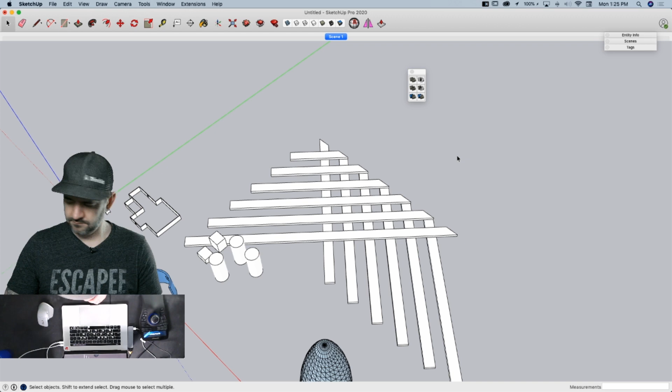Michael Burley a little while ago asked, well, this isn't necessarily SketchUp related, but he's doing remote classes. I think a lot of people are doing that, so I felt like maybe this is a little topical. He wanted to know about your setup, cameras, streaming software, etc. Sure. He was suggesting you could even stick around after the fact, but if you want to talk about it now, or maybe they can reach out to you on the forum too.

I could just give everybody a 5-minute, here's the way it's all set up. I actually run SketchUp on this computer and have another computer right over there that's actually doing the streaming. That takes a lot of load off of this computer, so you don't hear the fan running constantly, because all this is doing is running SketchUp. And then through HDMI output, it goes into a box that converts HDMI to USB and then goes into the streaming computer. And then I have a camera here, and then a second camera right down here.

And these cameras, along with the camera above, all go into the streaming computer. And in OBS, I just compile what you see on your screen and then stream that to something called Restream. Restream then sends it out to Facebook, YouTube, and Twitch all at once. So that's my nutshell setup here.

And Restream is that thing that keeps duplicating my posts whenever I try and type something. That's the one. Curse you, Restream.

Real quick, to jump back one, Blake asked, what was that extension? I assume that was the one where I selected and said, convert into components. This is an extension called Groups to Components, I think. And that's exactly what it does. It finds groups that are the same and makes them all into components. Now I'm going to go try and find that. All right. I should just leave this window open, huh?

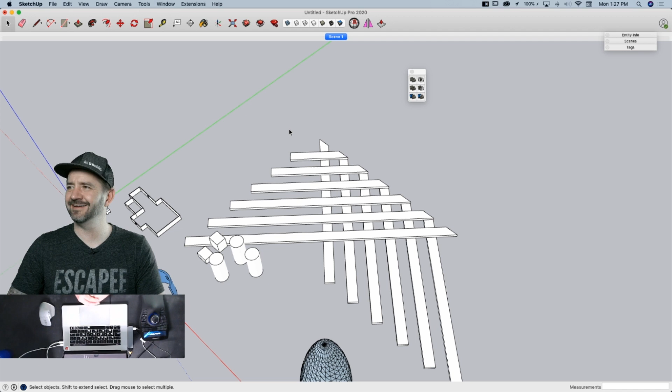Calvin Roy asked if there's a way to import audio or video or attach it to a file. If you can put it somewhere, you can share a URL through either model info or component information. Anytime I create a component, that's not a component, this is a component. I can share any of this data right here, including URL, so that could link to a video or audio. There's not a way to embed that data into it.

Kadi was saying, I'm not 100% sure, is that part of Selection Toys, converting groups into components? I can't remember what I have installed anymore. There's a Groups to Components extension from ThomThom, who made Selection Toys. And it might actually be part of Selection Toys also. I just can't remember. Okay, Kadi's saying it's part of Selection Toys also.

Okay, cool. So if you have video or audio data, I would recommend uploading it somewhere, putting the YouTube link into a component, or I believe here in model info, where is it? Right here. You can put data into the general model info, so you could actually put links or something like that into the description. Awesome.

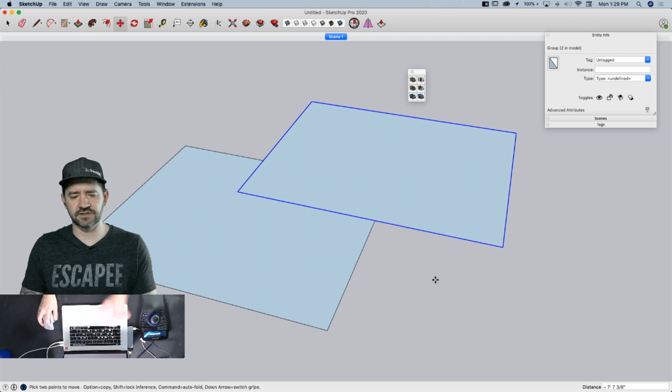It sounds like it's talking about what we would call layering. So if I had this, I'm going to make it a group. So if what you're talking about is how do I make this one be in front of this one, SketchUp's a 3D model, so you would do that by physically moving it in front of one another. If they're on the same plane, then they're, here, I'm going to do this too.

I'm going to come in here and make this Z-fight. So if I take this and I move it down so it's in the same plane as that one, there's not a way to say I prefer to see this over this. It's a 3D model, so just like in 3D space, if you take one piece of paper and put it on top of another, you see the paper that's on top. So if that's what you're asking, the solution is to move it closer to wherever you're viewing from, and then it'll be in front.

Look at that. Fancy. Manos on Facebook said, most of the time when I'm working in a full floor plan, for instance, inside a house with a lot of furniture, I cannot pick up something because it's becoming foggy, and then I have to click on the sky to be okay. It sounds like you're going into a component when you do that. If everything's becoming foggy, you don't have to go out to the sky. You can actually just tap the escape key, and that'll close the component you're in.

There was a question. Oh, here's a good one. Is it from Eli Ellis on Facebook? No, it's from Dennis on Facebook, but we can go back and look at Eli first. Yeah.

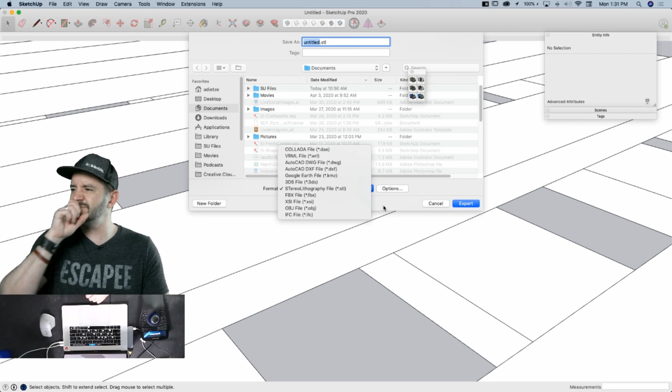Well, sometimes it's worth checking the CNC software to see if it'll import something else, because DWG you can usually get. Well, I was going to say most people seem to work with DXF for export. Obviously use what you need to use with the exporter or with the CNC, but generally speaking, DXF goes into most CAD/CAM software. If you have to have SVG, then you can export a DXF and convert it to SVG. Or like I said, I'm pretty sure SimLab has an SVG exporter as well.

Pull up SimLab there. So SimLab is a third-party application, not an extension. Right. Man, there's so many uses of the word SimLab. I don't even know how to find their website. All right. So I'm gonna jump up while you're doing that.

Dennis on Facebook's question says, I'm confused about the untagged layer and how it should be utilized. Let me just do this. This is going to be super simple. This little pencil should always just stay on untagged. Everything I draw, all raw geometry, should always stay untagged.

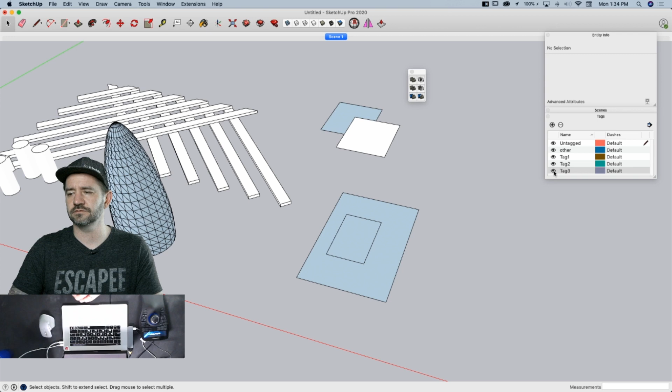Okay, so SimLabs doesn't appear to do SVG, but whenever I do a search for SVG on the Extension Warehouse, it links both to Faber, which is a third party extension/site for getting to your CNC. And then there's an extension called Face SVG, which is an SVG export for faces. I would totally recommend checking out Faber.

That's from a guy called Eric Schimmelpfennig, and he is a good friend of SketchUp's, and he is launching this thing called Faber, which is supposed to streamline, which I say supposed to, it sounds like I'm cynical. What it does is streamline the connection between SketchUp and CNC, where it actually takes your model, helps you break it down, exports that SVG file. Yeah, check out Faber. Absolutely, go see Faber.

Yeah, it's worth mentioning that Eric has been doing all of the CNC really. If you've been to a SketchUp booth in the last 5 years and there's plywood anywhere, whether it's a table or a backdrop or anything, Eric's the guy doing that.

Yeah. I just want to jump in. Dennis, I was not trying to blow off the explanation. It's just, in a nutshell, it can cause problems in the stability of your model if you start putting raw geometry onto other layers. I don't remember the exact issues or the terms to use as far as what happens. But if you start putting stuff on other layers, it can actually cause problems in how SketchUp stores your model. So that's why I just say don't do it.

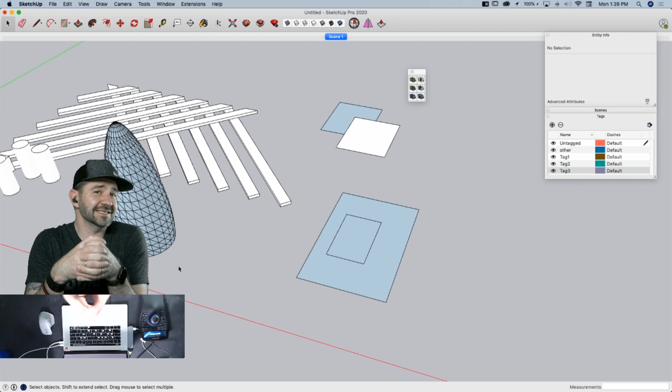That's his way of thinking. Some people have different rules about using groups based on if it's going to be copied or not. Some people say groups are collections of components, where you make everything that's a thing as a component, but if you have a bunch of them together that need to stay together, then you group that. It comes down to your preference and how you're using it. I know it seems like a cop-out answer, but there's not a set way that you have to do it, and that really comes down to you.

I have an issue that I run into personally with components, because these two things are components. They're a copy of the same thing. And the issue that I run into is I'll take this one and I'll copy it and I'll move over to the other side of my model, and I'll do something like, oh, I gotta grab this and I gotta make a modification here because this is gonna be functioning differently, and I forget about these guys over here that now have screwed my geometry up. So I run into that problem a lot.

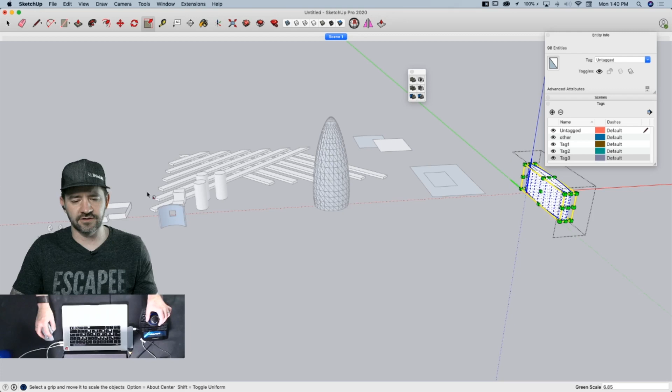Of course, you can fix that by right-clicking on a component and saying make unique. Now this is a unique component, so if I do select this, it won't affect these other components because this is essentially a new thing. And if you're really good at that, that works. But I know I've done that. I've actually done it on live a couple times where I go change something and then have to undo a couple times because of that.

So like I said, unfortunately, there's not a pat answer that this is how you have to do it. But that's one of the things to think about, is how you're actually using it and what's going to work best, components or groups, based on the thing that you're modeling.

So Tricky asked a question, which I think there's probably a more broad answer. He said, is there any chance SketchUp will ever export to 3MF? But probably could just be will SketchUp ever export into any specific format? I don't know what 3MF is. What SketchUp has chosen to do is export to the most commonly used exchange files. So these aren't necessarily specific. The issue comes to this. CAD packages, hardware interface, other 3D modeling softwares, paint programs, whatever it is, they all have their own proprietary file formats. And the fact is, SketchUp can't stay on top of and export to every one of those file formats.

It would be our full-time, that's all we would do for a given release, is say, we now support more file formats. And then anytime anybody changes it, we'd have to go back and update our exporter so it works now with the new stuff. It would be all we would do. So what we've chosen is to use these 13 2D and 3D file formats and export to them because they're the most commonly used crossover file formats.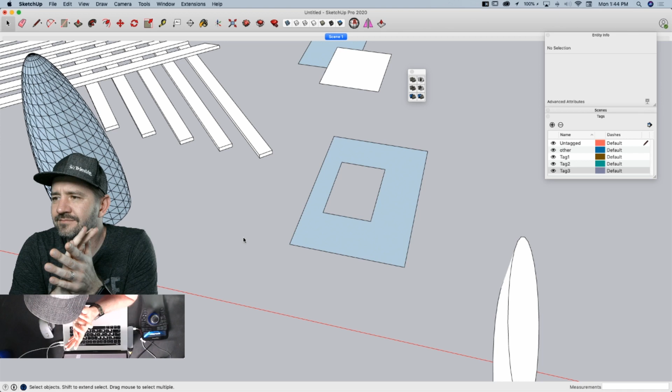So Cowboy USA just joined us, and first of all, he'll probably be excited to hear that we're going to do more machine parts on Wednesday. Yes. But then he also asked if there are any free or inexpensive extensions for designing machine parts. I mean, a machine part's really just a 3D model, and it's kind of just what SketchUp does. So if there's a specific part of designing that you had a question on, we can dive into that. I don't know of any extensions that are just machine part design tools.

So yeah, maybe if there's something in particular as part of the workflow that you were looking to speed up with an extension, you might be able to find something, but I don't know of anything that's geared just towards that, other than, I would say, use Solid Tools, probably.

All right. Go Fly Drone just got a 3D mouse, and he's learning how to use it in SketchUp, and he's looking for any tips, any hints to get used to it. So here's my example of this. I always remember when my parents first got a computer, my dad would play solitaire all the time, and I realized that inadvertently solitaire is basically how to teach people how to use a mouse.

I remember when I started training, it was a ridiculous setup. I was 18 years old, and the people I was training were primarily structural engineers in their 60s. We could do other stories there, but one of the things that someone else who was a trainer told me is, if people are having a hard time, when you take a break, pull up solitaire and just tell them to play that for 10 minutes while you take a break, because that's all it is. It's just moving your mouse.

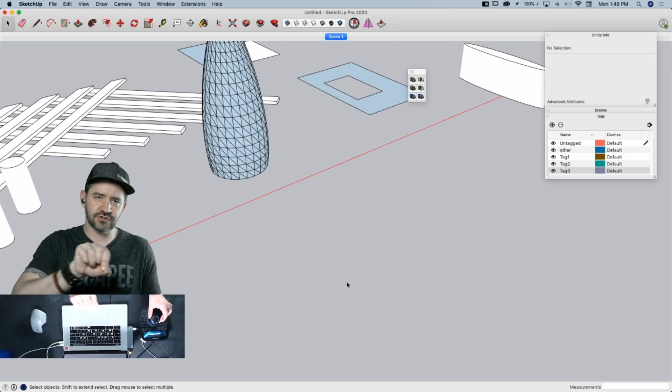So, one other thing, if anybody out there gets a 3D mouse, if you look in your menu, this is incredibly important. Object mode versus helicopter mode. Object mode says this mouse is oriented as if you were holding your whole 3D model in your hand. So as I turn this way, it's as if I was turning my hand like this. Helicopter mode is totally the opposite. It says if you had your camera in a helicopter and you're on the outside, if I turn this way, it's going to turn my helicopter around like I'm flying on the outside of it looking in.

I don't know which is better. Personally, for me, object mode, like I'm designing this thing, even if it's as big as a house or a landscape, I want it to be a thing that I put in my hand and I'm spinning it around in the orientation like this. So that's extremely important. Check that. It's usually in the menu or the click button on the side of your 3D mouse. And I mentioned this last time, rotation center, make sure auto's turned on, because otherwise it'll spin around whatever is selected, and that can be rough if it's off screen.

So where did that go? So Nathaniel Wilkerson had suggested to Cowboy fillets. Is fillets an actual extension? Do you know? Oh, I don't know. Is there an extension called that? That's what I'm looking to see. I see there's an extension called milling tools, which sounds to me like an extension for machining. Not an extension. He's just saying learn how to do it.

Okay. All right, fine. Ray chimed back in, said that he groups his groups. He likes to group his groups and sometimes needs to remove one of the groups, but needs to keep the group. So deleting is not a solution. Oh, so you have a collection of pieces and you take one out of the group. If that's what you're saying, then here's what I would do.

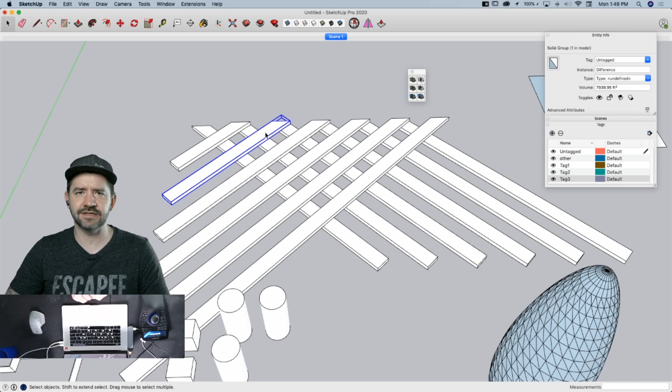I don't know because I haven't specifically seen that. Gary, if you have an example that you could actually share, hop up on the forum. You can share it in this Q&A, live Q&A today, or you can start your own topic and just share a file. Then somebody can hop in and actually take a look at what's going on. I don't know exactly what would cause that, but I'm sure we could figure something out.

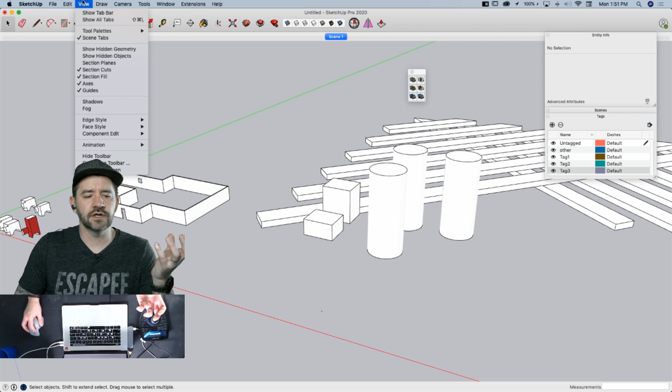Or come in here and say, show me my hidden geometry, or show me my hidden things, find them, and say unhide. Either one is okay, but it's not quite as maintainable as properly tagging things and then switching visibility using your tags. So I don't know if that was a question or not, but that's my thought.

I want to throw a shout out for the Outliner, because the Outliner lets you go through and hide objects all day long, right? We never talk about the Outliner, and it's so awesome. Great, but apparently on my other monitor, maybe? I don't know where my Outliner went. Oh, it's on mine. How weird. Oh.

So this is a technical problem that would come up back in the days when I did tech support on a regular basis. I've lost my window, and yeah, it used to be on another monitor, and you've unplugged from that monitor and it's still trying to open on that monitor. Yeah, and I'm just having issues with that today. I don't know why. I normally don't have a problem with that, but every once in a while, I find my computer just wants to be turned off and not put to sleep and then woken up again. So maybe it's time to just shut it all down, bring it all back.

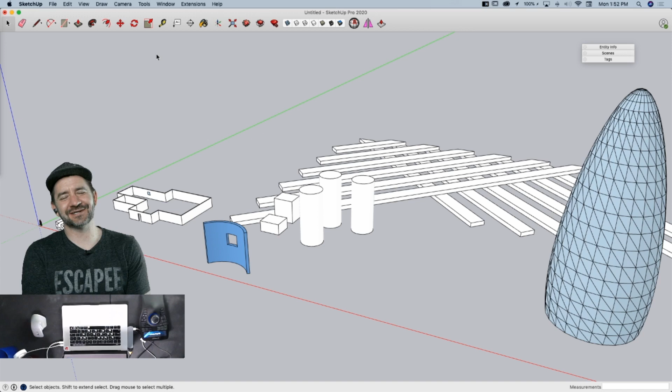So I am curious, because sitting next to you every morning whenever you hooked up your computer, does your computer behave better at home than it did in the office? No, I'm still having this problem where every time I start my computer, within the first 5 minutes of starting it up, it freezes. And it just sits there for a minute or so. So I have to plan ahead, open my laptop and then go do something and then come back. I don't know what that is.

Okay. Are you opposed to using reset workspace right now so you can play with the Outliner? I think it's going to, yeah. Actually, hey, I'll do it. It might be kind of late. Yeah, see, did you see what just happened there? Windows just jumped. I don't know. That's fun.

I think it's gonna get rid of all my windows, but now I can come back in here, turn on my outliner. Maybe that'll fix my problem. But yeah, this is a nice way to, well, if everything wasn't named group. This would be a good reason why you make components and name them. Exactly. So if I do grab a specific piece and then hide it, to work without having to have hidden geometry on all the time, I can come in and take my hidden items and turn them on and off.

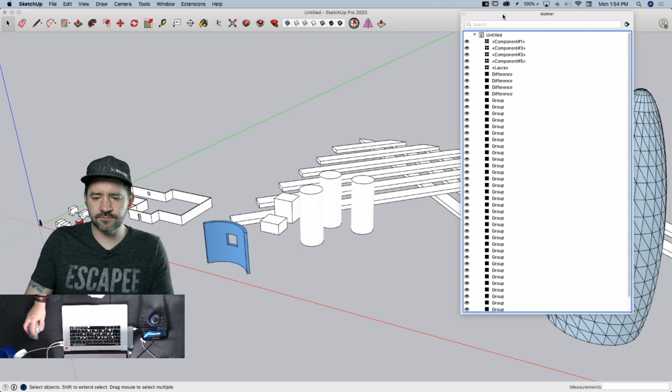Do you have a skill builder for this? What's that? Do you have a skill builder for outliner? I do. Yeah, it's actually an older one. It's one of the first. It was within the first year that I started doing videos, but it still all holds true. I will just say that we have been making changes to the software that make using the outliner a more essential tool.

So actually keeping outliner open as you go through and work through models is a great way to do this stuff. So yeah, you're absolutely right, Jody. Keep an eye on outliner if you have to hide things. Yeah. Well, and it's also just gotten, with 2020, it just got incrementally better. Yeah.

So were we going to try and get any other questions in here? How about two more? Orangutan on Twitch wanted to know how to change specific line color. There's two things you have to do. One is in your styles. Here we go. In styles, you have to have your style that you're working in set right here. Oh, that's that one. Where's the one I was just in? Oh, there we go. So if I go to edit,

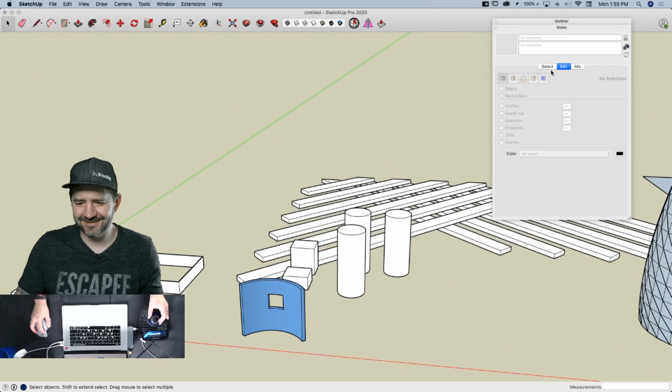this is odd. What's going on here? I can't edit. Do you need to select something? That's weird. Yeah, I got a thing happening right now. Wait, are you editing style in model? Yeah. It's not showing me the name of my styles, nor letting me edit them. This is new. Nice. Look at you. Yeah, so normally it's as simple as changing from all the same to by material.

All right, I'm gonna do this. Oh, I can't quit SketchUp either.

Looks like I have a YouTube celebrity visiting us today, Mr. Swan. Hey, Izzy. I was just chatting with Mr. Izzy Swan earlier. We were talking about his own social media platform, the Makers Playground, which is a pretty cool spot to hang out. He showed up just in time to see me not be able to use SketchUp. Great.

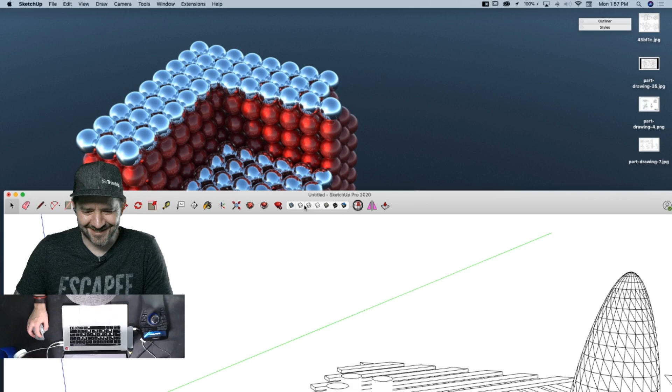Yeah, won't let me close either. So I'm guessing I have a window open somewhere that I can't see, or it still didn't explain why it's not visible. Like everything is grayed out. Yeah, I don't know what's. That's awesome. That's a good time. Yeah. So as I was saying, let's wrap this thing.

Someone asking about outliner. It's been around. Do you remember what version outliner came out? It's been around since at least SketchUp 8, right? Yeah, it's been around a long time. Maybe since 6. It didn't do everything it does now, and there was actually some performance issues in recent versions, but those have been in Windows specifically.

Windows had this lag associated with Outliner if you had it open while you're modeling, but we're working on those, I think. I don't know if they're better in 2020 or if that's still in progress, but that's pretty cool. I think there's a lot of performance fixes in the Windows version. On the Mac version, I don't think they've got them all plugged down. But yeah, I think Cody suggested, and I agree, it's probably worth doing a new one because there's been a number of updates to make it worth it.

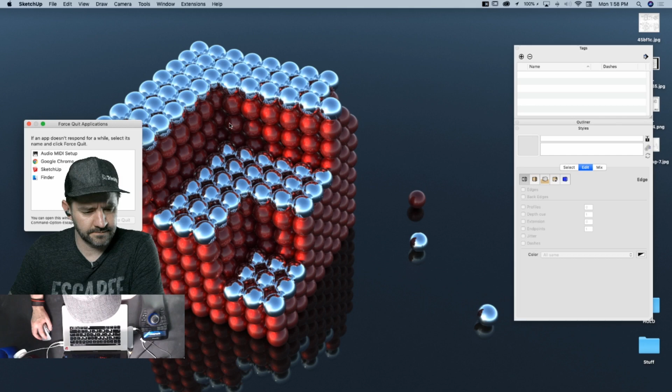Oh, maybe. So Sturkin suggested maybe since you've got so many styles in there, you just need to pick an object. Oh, or you just do a new document. That also works. Something's definitely going on that's not right, because it's not even letting me quit it. All right. One moment, please. All right. Let's hop back in there.

You know, remember, that's the effort I'm making right now. If there's a problem, just get through it, get over it. Stop trying to figure out what's going on. Just move on. This isn't a troubleshooting live stream. That's right. This is a Q&A. We've all seen me struggle with that.

I need answers. All right, so it looks like all of my windows have shown up again. Okay, so quick answer to what you were asking. Oh, this is a mess. All this stuff floating around. All right, so quick answer to what you're asking. Here, I'm just gonna draw a box.

So if I go into my styles and I say edit, right here, right now, it's all the same. So all my lines are gonna be black no matter what I do. But what I can do is change to by material. And then what I can do is, it takes a little bit of precision, but I can actually grab a color and come in and apply it to a line rather than just to a face.

So you can see that those are red now. This actually works real good in conjunction with selecting first. It's easier to select a bunch of lines first and then grab a color and fill them because their selection gets colored. So yeah, it is possible to color an individual line like that.

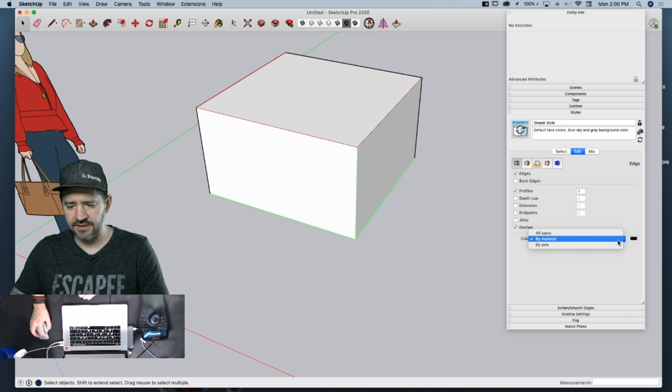And then you can also do it by tag, and you can also do it by axis, right? Are those both defined in styles? So by axes is part of the styles. So if I come in here to the same settings for this style, I can come in here to by axes. This is a great tool if you're working on models that are supposed to be nice straight lines. This will actually color code everything based on the axes it's parallel to. That's an awesome option also.

The question was, coloring one line. Yeah, that's true, you do it by material. The other option, if I change that from by material, is I can come into tags and say color by tag, and it'll color everything, including the edges, to the color set for that specific tag. So if I add another tag, I can come in here and change this tag to a different tag, and that's going to keep the color based on the tag color in the tag window. So that's an option too.

All right, it's officially 2:00. Any more questions? I think we're probably good. It seems like we're petering out at this point too. Yeah, I think we're good. We had a lot of people telling me to force quit. You were all right. I did it. I like the reboot suggestion. That would be exciting because it would bring us all down. Good times.

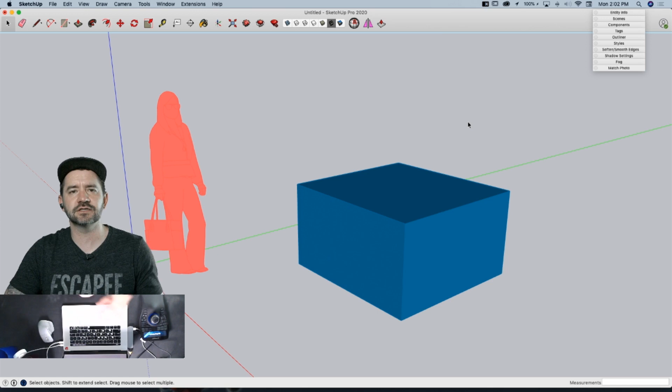Wednesday we'll do a model along where we'll do more step-by-step creation. I found some more drawings for machine parts, so very accurate, specific dimensions that we'll be working with. We'll get those input, drawn up, maybe exported. We'll see, and yeah, that's going to be a lot of fun.